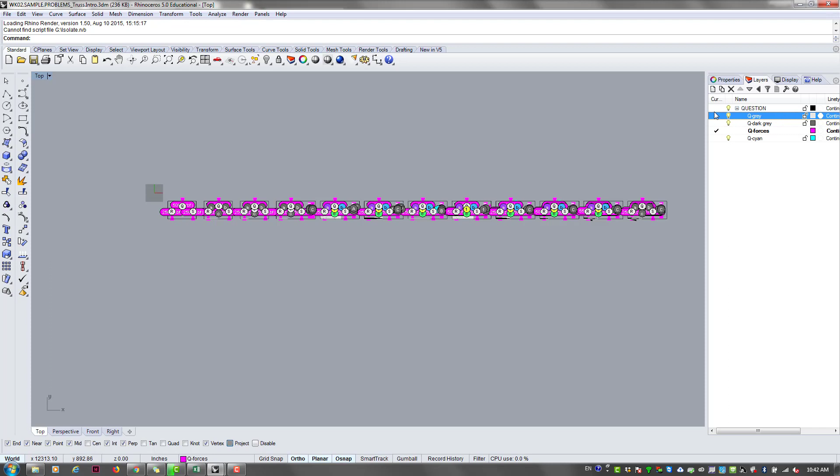This one here, right? It's called week 2 sample problems truss intro. So if you open the file, these dots are kind of annoying, but that's what you're gonna see. This is before I had this video recording thing, so I wrote all the processes in one go, which you can read, which is basically what I'm going to follow.

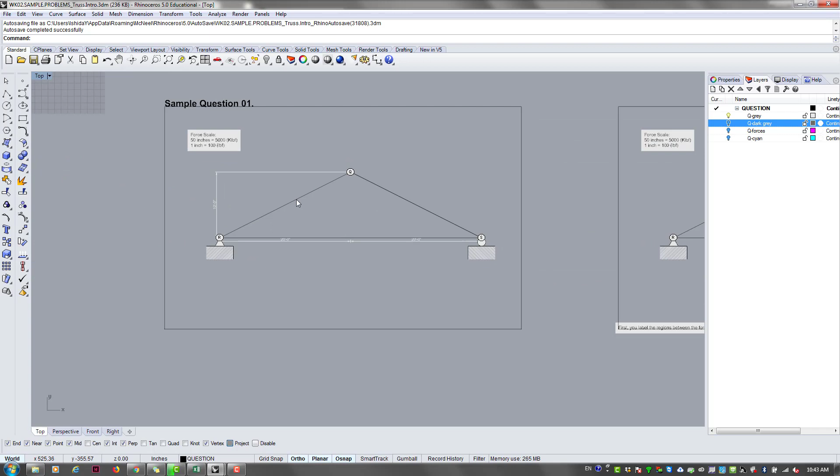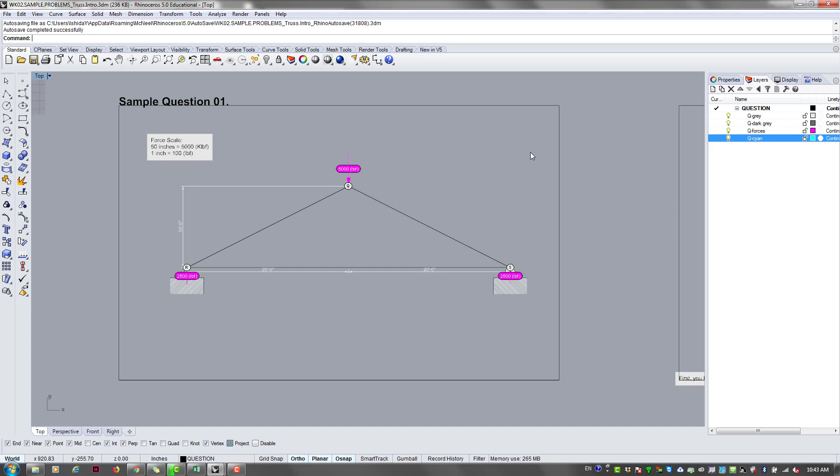So this is, you wouldn't call this a truss, but it's the first one that we did, the single triangle, that was actually called a simple truss, right? And if you keep connecting two members, one joint, it's a simple truss. So you could call this a truss, and it's the simplest configuration, so it's good background for us to show you how to analyze the truss. It's basically the same process for something more complicated, but for the sake of demonstration, this is easy.

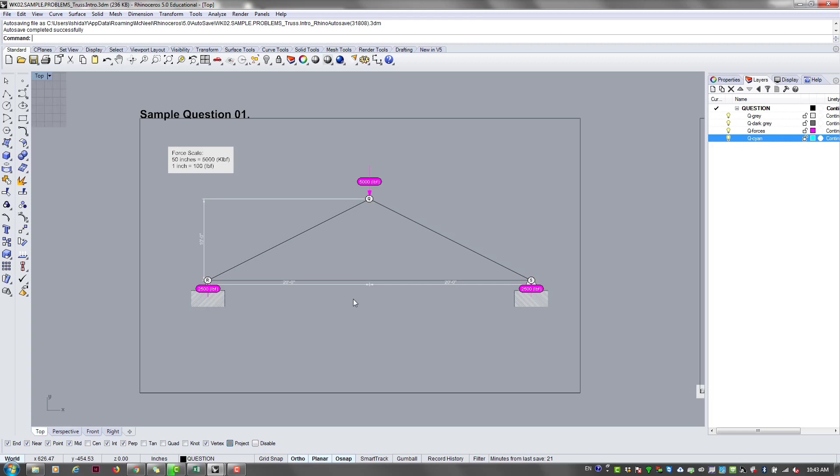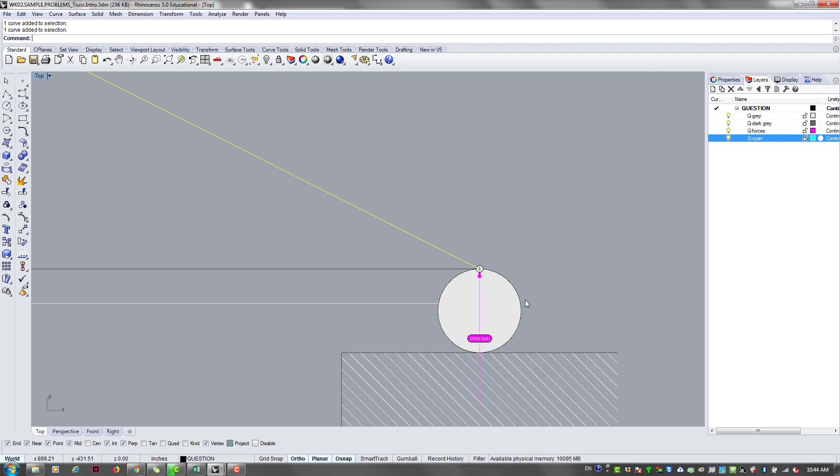So let's assume a triangle that's symmetrical, made of 3 members and 3 joints, pin joints, right? And then you have 2 reactions, as we talked about last week. One is a pin joint, the other is a roller joint. You could argue the pin joint has the capacity to have 2 reactions, but we know this one is 0, because if the applied force at the tip was diagonal, it's gonna have a vertical component and a horizontal component.

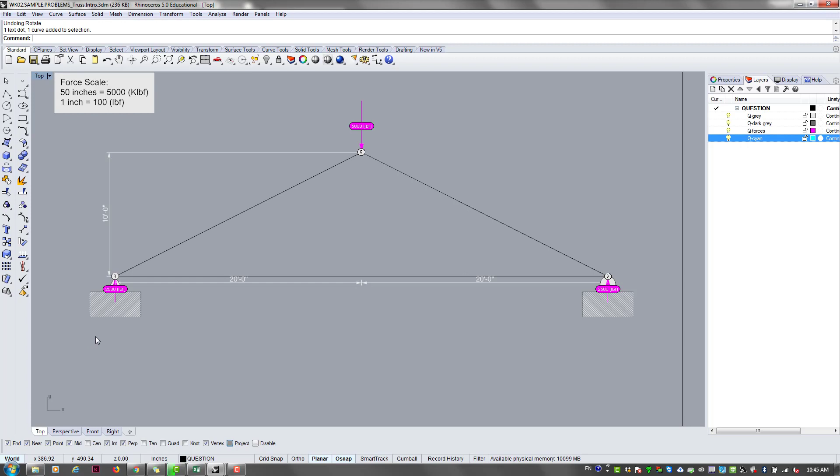If the applied force is diagonal, then the reaction at point R is going to have a horizontal reaction like that. But for this particular problem, we are just looking at this vertical applied force, so we have 0 horizontal reaction here. Anyway, we are going to learn how to determine whether each of these members, RQ, QS, and RS, is in tension or compression, and how much force there is in each, right?

And as always, the force scale. Who didn't take structure 1 with me? It's actually quite a bit. Okay, so if you don't understand what I'm saying, let me know, because we did this graphical method, so I'll try to make sure that you guys get it.

But anyway, we're gonna solve this graphically, meaning we are not gonna do a lot of calculation, but we are gonna draw a diagram of how the force flows in this truss, and draw everything accurately to scale. We're gonna measure the vectors and then determine how much force there is in each of these members. We are representing these forces with arrows, with vectors. But the first rule is that it's absolutely necessary that they are drawn to scale.

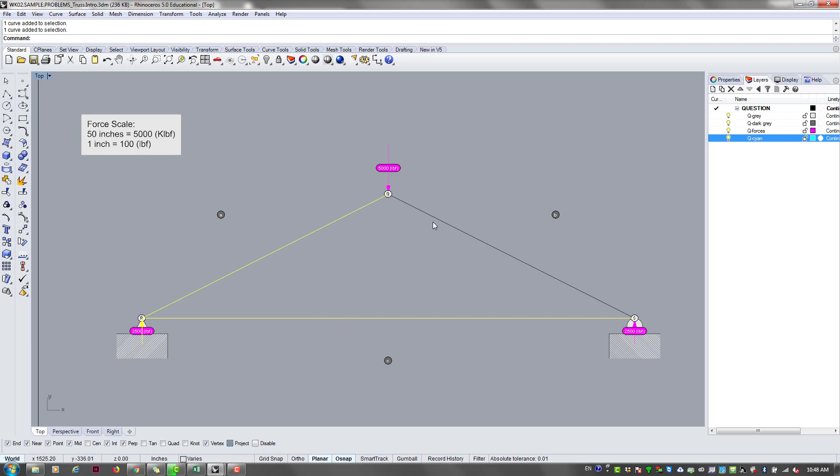So now we are gonna go to the next step. The first step of this graphical solution for the truss analysis is taking the outside of the truss and labeling these regions divided by these forces. So let's say, very diagrammatically, this truss and these three forces divide the world into different domains. It's gonna sound weird, but this you don't have to draw. I'm trying to explain something.

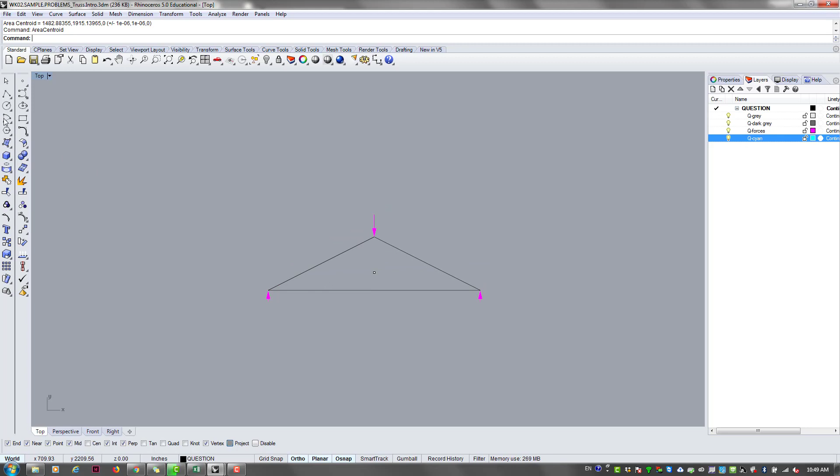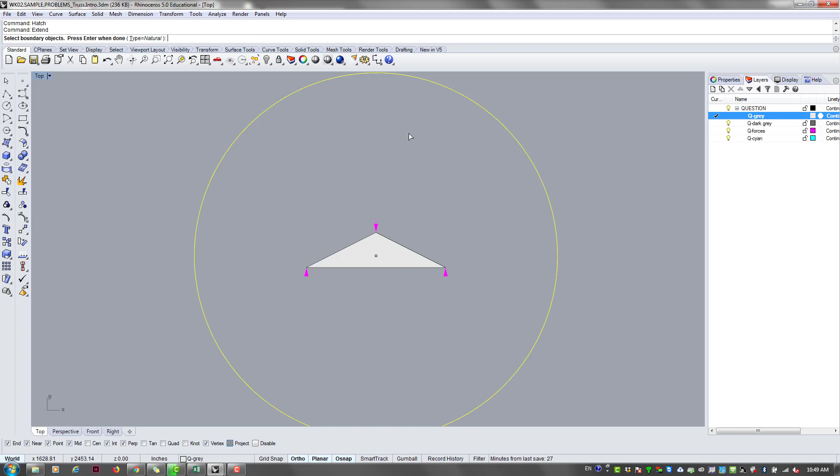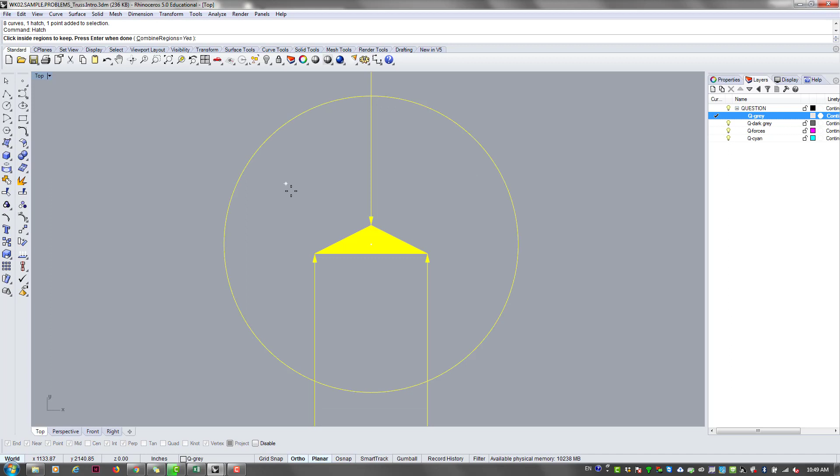So let's imagine we are in a 2D world, and the entire world is a circle, right? You have the inside of the truss and the outside of the truss. This is one area, I'm gonna use a different color. But also forces have these lines of action, right? So let's assume you're extending these forces infinitely. So now the world is divided into 1, 2, 3, 4 regions actually.

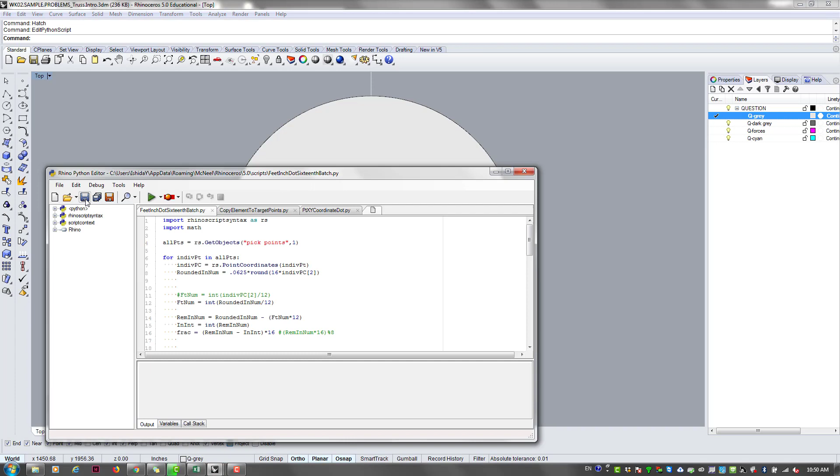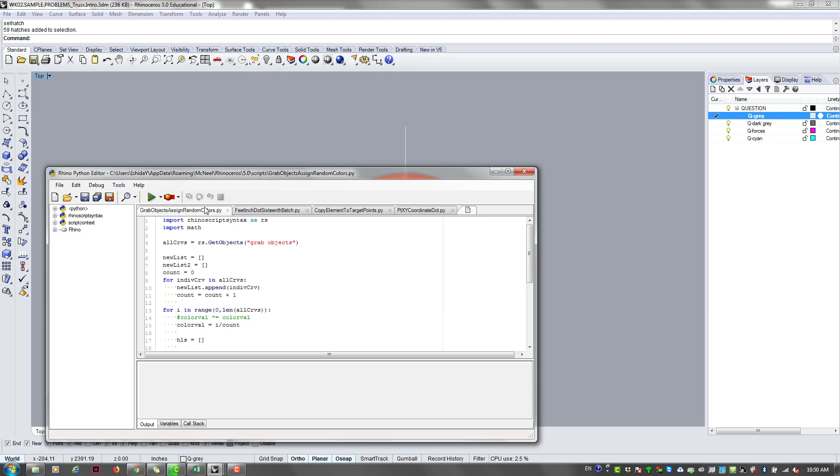And I'll share this script with you at one point. Just gonna color these 4 hatches. Oh, okay. So one region, two regions, 3 regions, and then, right, so you have these 4 separate regions, right? Is that clear? So I'll bring it back to here.

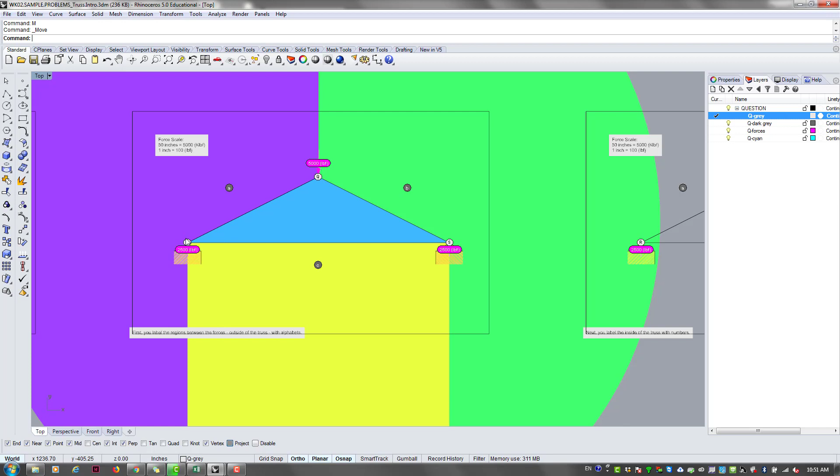Right, so now you can see, basically we're labeling all these separate areas. This is a really simple truss, so I'm not going to go inside the truss. We're just looking at outside of the truss, which is divided into these 3 regions, right? So between this reaction on the point R and the applied force at point Q, that's one region, and we're going to label that as A.

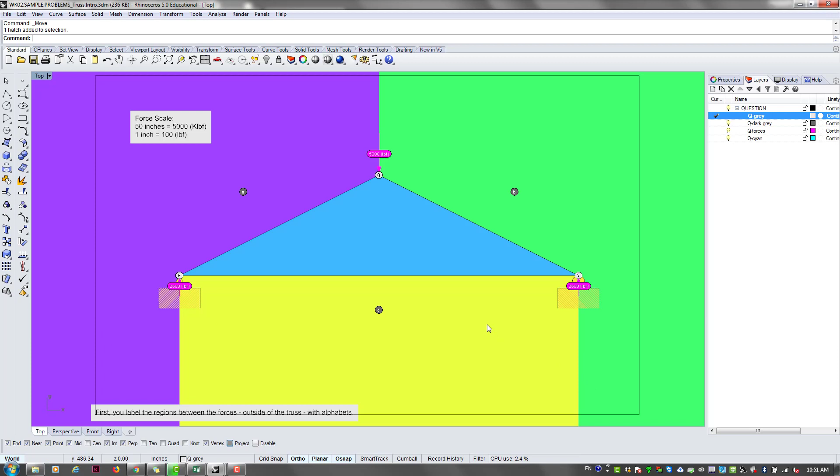On this side, between this applied force and that reaction, I'm going to call this B, right? And then between these 2 reactions, I'm going to label that as C. So that's all that's going on in that diagram. Hopefully that's clear, right? So there's A, B, and C between all of these forces. So that's the first step. First you label the regions between the forces outside of the truss with alphabets.

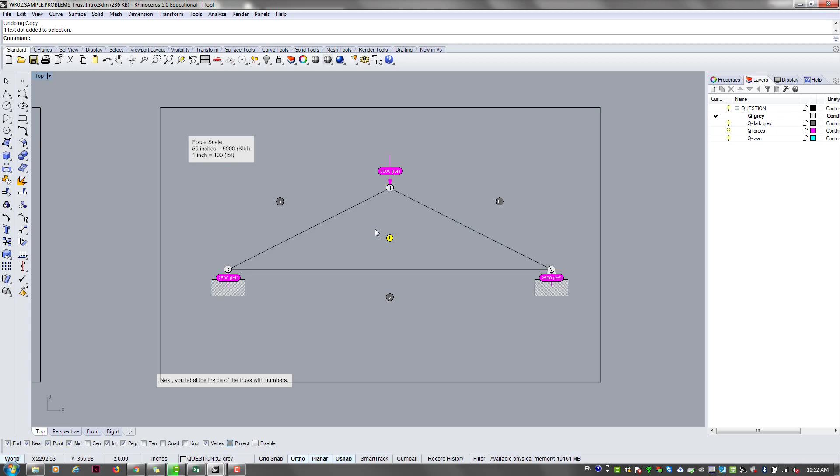Next step, yes, there's also a region inside the truss. Just to distinguish the outside world and inside world, we are going to label the inside of the truss with numbers. In this case, we only have 1, but we're going to get to more complex ones later, where we're going to number all of these with different numbers. For now, we're using this really simple truss, so there's only 1 region. So that's the first step, labeling outside and inside of the truss. So A, B, C, and 1. So far so good? Yeah.

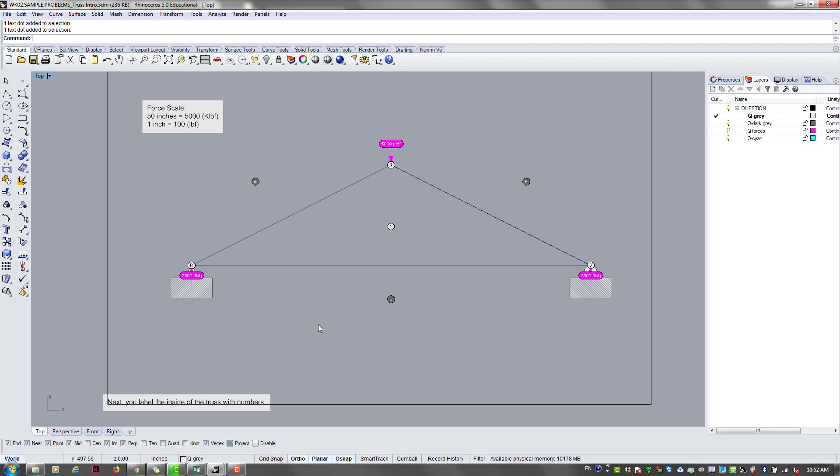Then next step is, alright, that's a wrong text. It's actually a form diagram. So we're gonna call this a form diagram because this accurately represents the form of the truss, right? Dimensions and angles and all that. This is what physically the truss looks like. We're now gonna start what's called a force diagram, which only diagrams the forces and has something to do with the geometry of the truss, but it's not going to look like the truss. It's going to analyze the flow of the forces in this truss.

So first step, okay, I'm drawing it in here, but I'm going to start new. First step is you basically want to put aside all of the forces that you see to the side, right? So we know that there is one applied force going down, and we know there are two reactions going up. So let's just look at the applied force for the moment. I'm just grabbing this one, copying it to the side. And we know this represents 5,000 pounds, right? So same size.

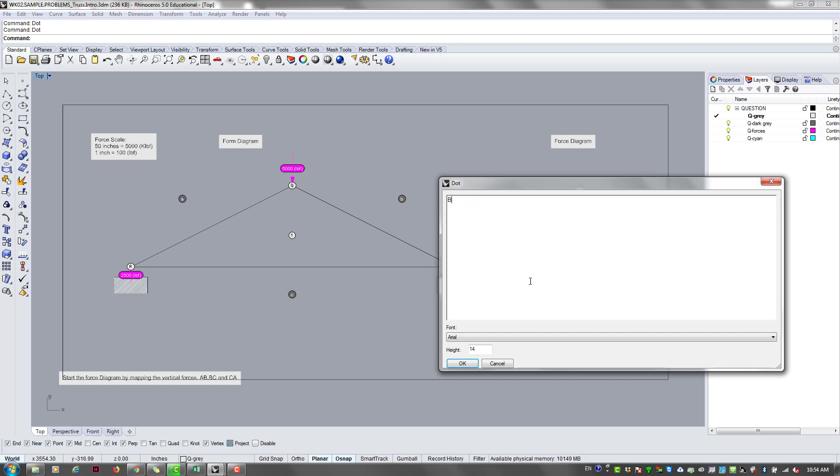And this happens to be between zone A and zone B, and somehow we want to be able to tell that from the force diagram. So you're always going to go from left to right, and we're going to label the start point of the arrow with A, end point of the arrow with B. So you can tell this is arrow AB. In the force diagram you read the start point and end point, so this is arrow AB. But also in the form diagram you can tell this is AB because it's between A and B. So either way, this is called AB, starting from A, ending at B. So that's the applied force.

But we also need to map the reactions, and because these are all vertical, we can connect them. And of course, because the whole thing is in equilibrium, this truss is not sinking into the ground, right? It's static, it's not moving. It's being supported by these two reactions, so you know that the total of these two reactions must be equal to the applied force. So first, the reaction on the right side, right?

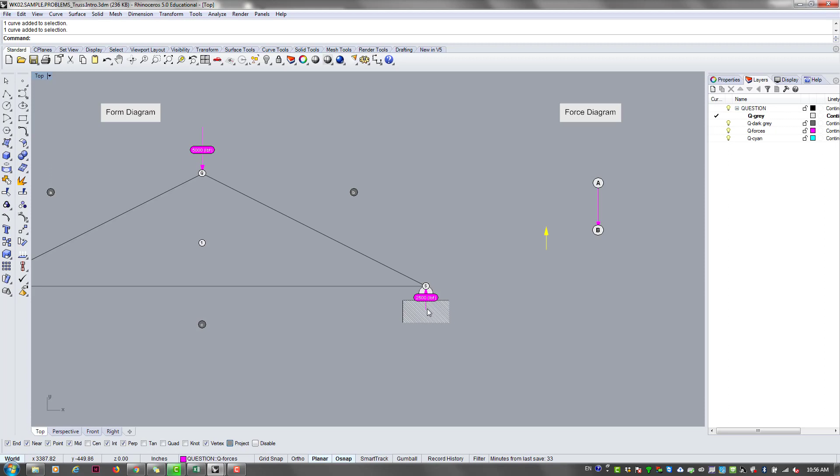If I take this reaction, it's between zone B and zone C. So if I follow this rule, this one was AB, and it started from point A, ended at point B. Now we are looking at this force, which is between BC. We're always gonna go in a clockwise motion. So this is called BC. So in the force diagram, it must start from point B, which is here, and end at point C. So now we know the end point of that upward arrow is C.

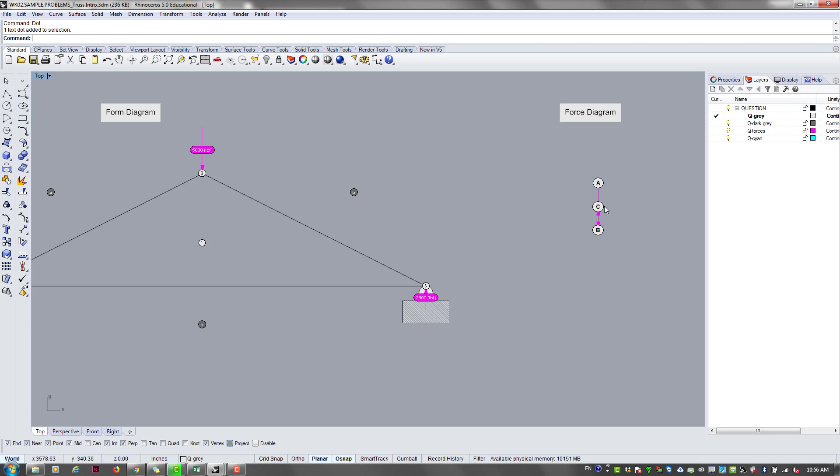And notice that, just to differentiate this and this, I'm using capital letters on the right side and lowercase on the left side. So we're gonna look at the next one, which is that reaction on the left. If you look at these zones, it's between C and A. And the name of that force, following this clockwise convention, has to be CA.

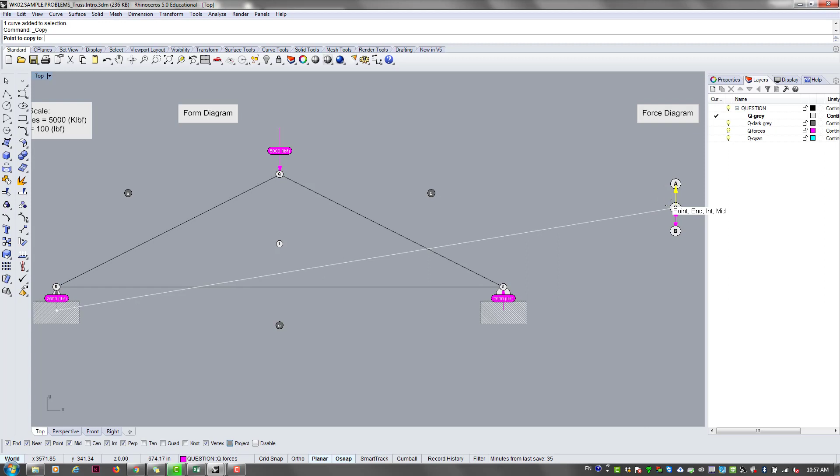And same thing on the force diagram. So this guy, which I'm gonna copy, is gonna be called CA. And following the rule for the force diagram, it's got to start from point C and end at point A. And it actually lands at point A because these two are half and half of the downward arrow. So that's the first step for the force diagram.

Any questions so far? We good? Okay. So now you can read all of these texts later. So let me just, yeah.

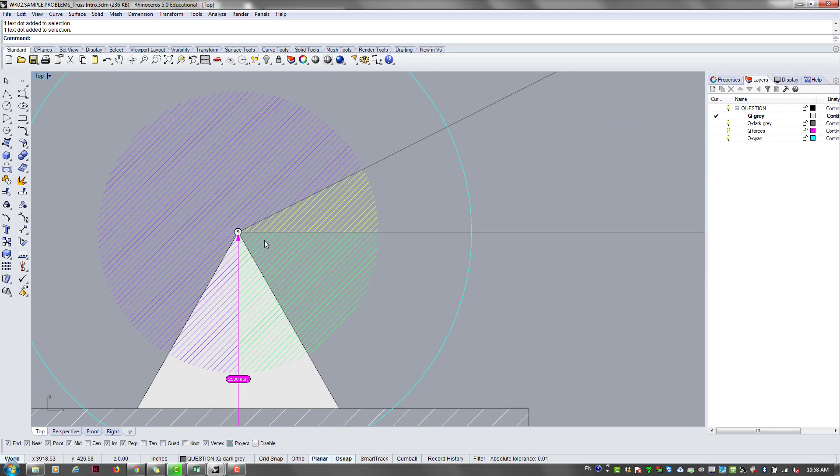So now what we're going to do is that so far we've only looked at these zones that are outside of the truss. So now we are going to go in. Also, we are going to look at every corner point of this truss. We're going to start from point R, go to point Q, then point S. So following that zoning rule, if I zoom into point R, let's assume the entire world is this round thing, right? And now it's divided by the members of the truss and the force that's present in there.

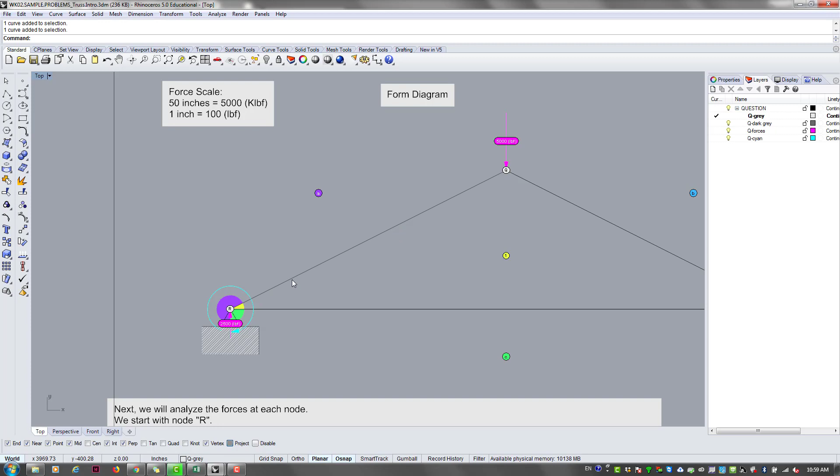The reason being that if you look at this point, we don't know how much or which direction yet, but if you're pushing this point in this truss, we know from last class that each member of the truss only has axial force, right? It's either being pushed or being pulled. So this member must be experiencing either a straight compression or tension along this direction. It's actually pretty easy to guess that it's in compression because it's being pressed down. So there's got to be a force in this direction, whether it's going this way or that way, right?

And also there's got to be a force in here. So even though we don't know how large or which way, we know for sure that there are some forces in these two. So the force divides the world. If that round thing is the entire world, with center R, between this force and that force has to be seen as one zone, right? And repeat that one more time? Yeah, so from where? The zones. Yeah, so it's following the same rule, the forces divide the world into different zones, right?

So there's got to be some force here, some force here, and some force here. And now we're focusing on point R. So we have this round infinite world whose center is R, right? I'm drawing it very small. But now because we have these 1, 2, 3 forces, that's gonna divide this pie into 3 pieces, right? So we have this first piece, second piece, and third piece. Now, all right.

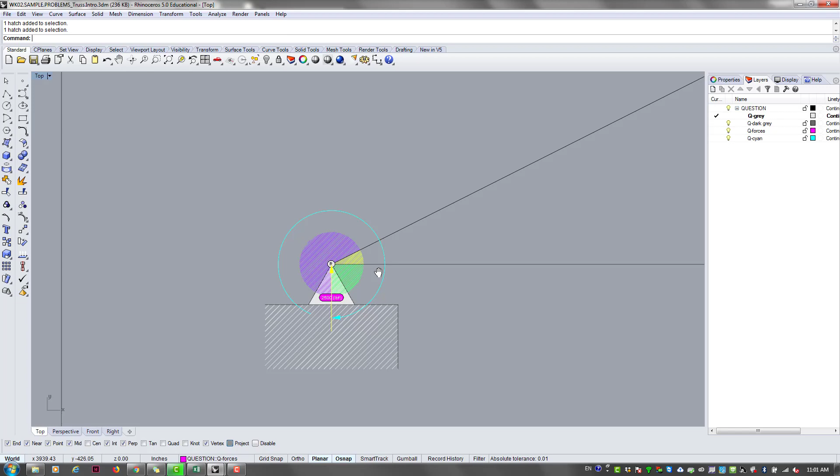So looking at that, we were able to call that force by referring to different zones, right? I color coded this. So C is still here, right? This guy is still C. That's still A, consistent with the first labeling that I had. And these two, that's inside the panel, so we labeled that as 1, right? So looking at this point R going clockwise, there's zone A, then zone 1, then zone C, and now you're back to zone A. Keep going around and around. Makes sense, right? So this force on the force diagram, we called it CA.

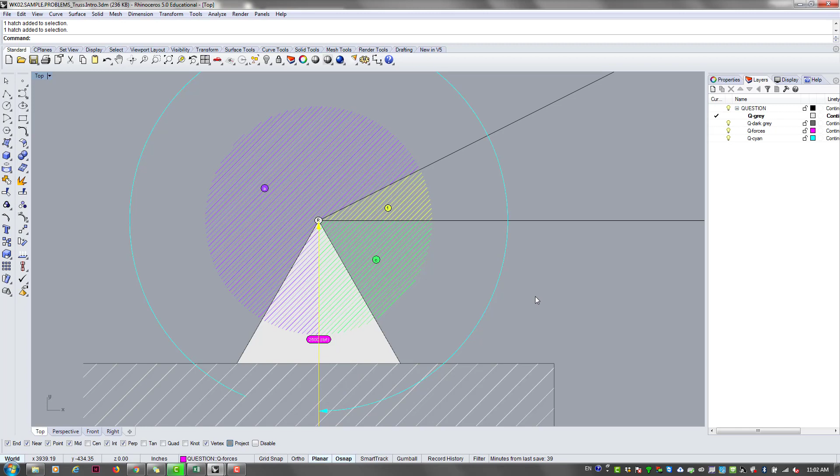Let me go back to 2 views, actually. So that reaction, because it was between C and A, going clockwise, starting from C and ending at A, was called CA on the force diagram, which is this guy from C to A, right? Makes sense? So following that same logic, this force in this diagonal direction, anyone want to guess the name this force should be called on the force diagram if we were to draw one?

A, where's B? B is way out here, right? So AB was actually, let's see, this was going from C, going clockwise, right? So you go from C, across the force, and end at A, so this vertical is called CA. Now we are looking at this one, you're going from A, across this diagonal, and ending at 1. Yes, so this diagonal force will be called A1.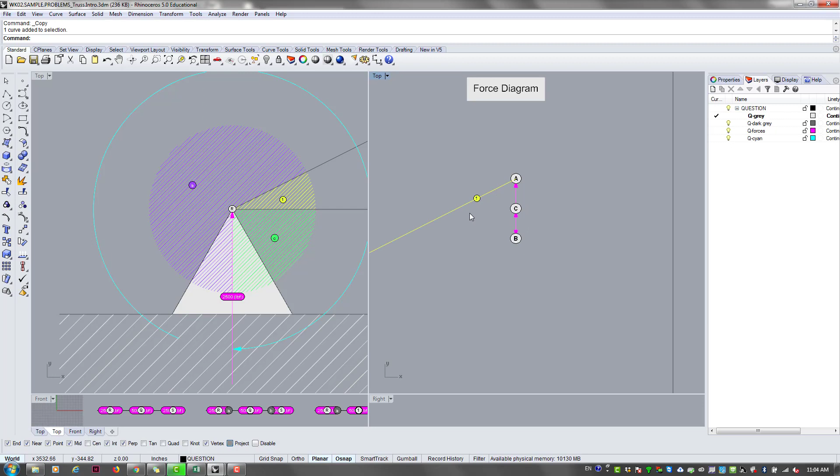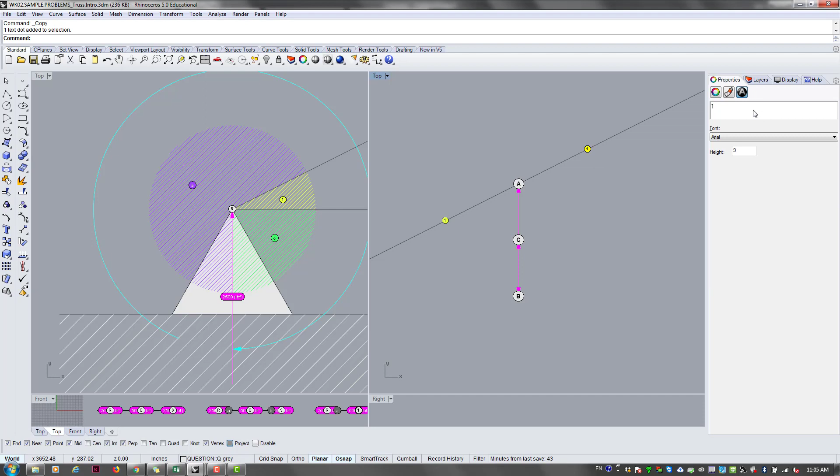So anyway, at this point we know there is going to be a force A1 on this force diagram starting from A ending at point 1, but we don't know actually. 1 could be here or there. Right. Is it kind of hard to see the text? So at this point we don't have any information to lock down point 1, but we know for sure that it's going to be along this line, but we don't know where it is yet. Make sense? Alright, so we're just filling what we can for now, right? So we kind of covered whatever we can for this force for now.

Now we're going to look at this one, which is between 1 and C, and we're going to represent it in here. So what is this going to be called? Right, this was A1, this was CA, so this has to be going clockwise. 1C. 1C, yes. So there's going to be a force called 1C on this diagram. It's going to start at point 1, which unfortunately we don't know. It's going to end at point C. And fortunately we know where C is, so this 1C thing is going to end at C.

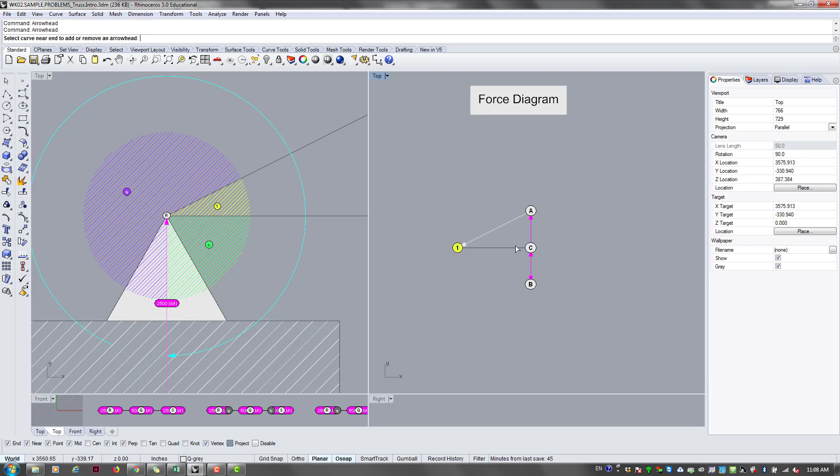So now, interesting thing is that, not to jump ahead too much, but now we have analyzed point R. We got all the information that we could from point R, right? But we still have 2 more points, so we're gonna go to point Q and point S. Yes, the force diagram is just for point R, for now. But we can now dictate what forces are acting on point R, right? So we have this reaction, which was CA. If I want to determine what this force is, I need to grab A1, starting from point A, ending at point 1. So that's how much force is acting towards point R.

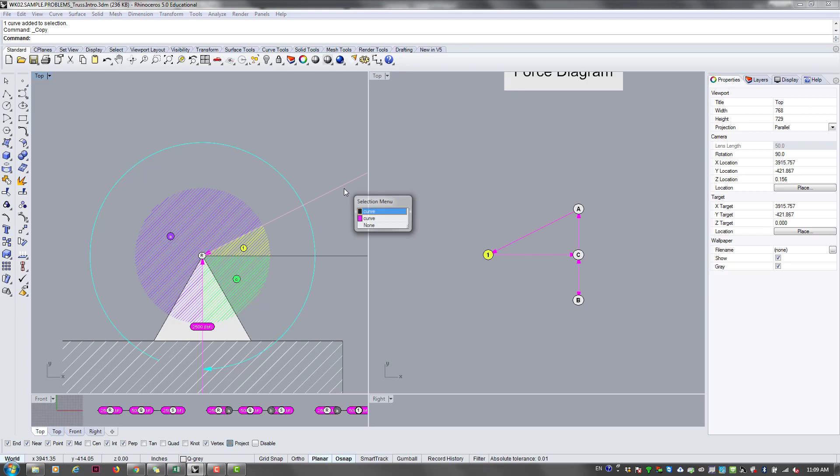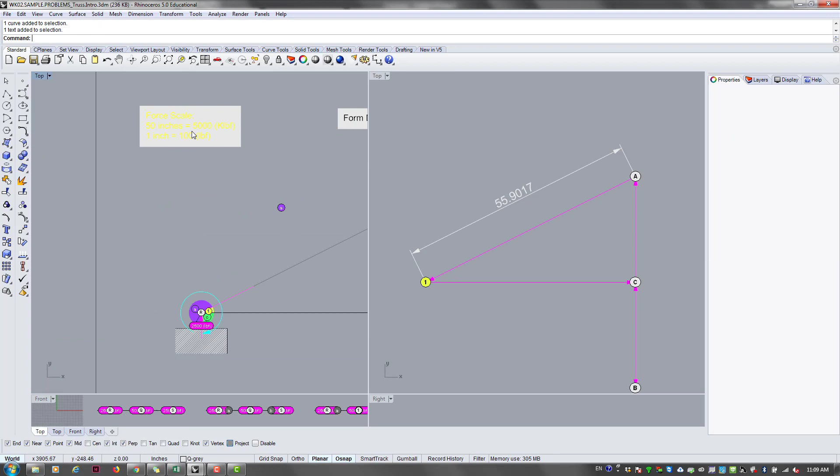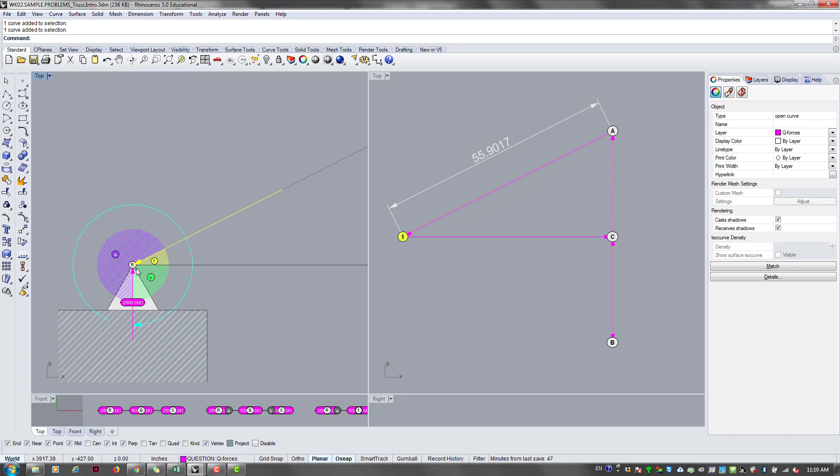And because we're drawing everything proportionally, the length of that vector matters, right? So this is 55. I don't like the fraction, I don't like the feet, so I'm gonna do decimal inch. So this line is like 55 inches, and if you remember our force scale, 50 inches was 5,000 pounds, 1 inch was 100 pounds. That applied force was 5,000 pound force, which is here and here, right? And now we have this diagonal force pushing point R, that is 55 inches, so it's like 5,590 pounds. That makes sense?

So we can determine the magnitude of this force by getting the length and applying the force scale, which we'll get to later. And we also know the direction of this force, it's pushing point R. So if we are analyzing a point, and the arrowhead is pointing to that point, that means it's being pushed, right? So then the diagonal member must be in compression, and also this reaction at point R is pushing point R up, which makes sense.

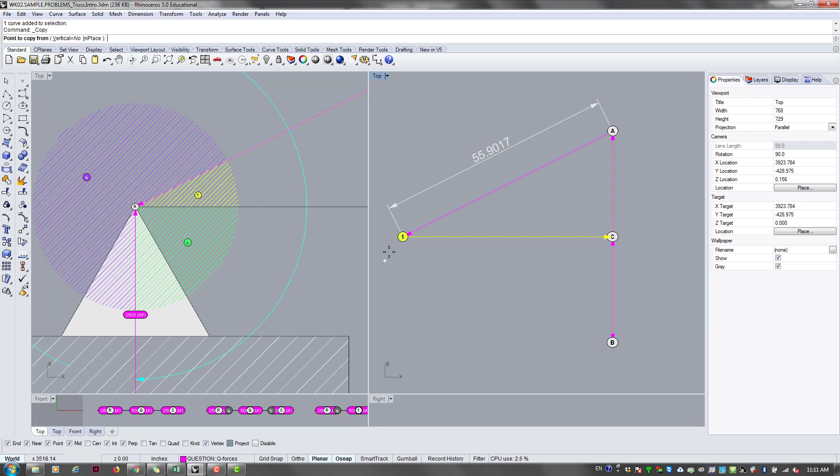And another thing we can determine is this guy, which is between 1 and C. So the force here has to be force 1C, which I can grab from here, starting at point 1, ending at point C. That's the force acting at point R along this truss chord. So now, because the arrow is going away from the point, it's pretty obvious, right? This point R is being pulled by this force.

Pulled, yeah. This was being pushed, and R was being pulled by this one. So already, because it's symmetrical, we know if this is pulling on its end, it's got to be pulling the other end the opposite way, right? Because if it's going this way and that way, this chord is flying through the air, right? So it's pulling. So the bottom chord is in tension and the top chord is in compression.

So that much we already know actually. I think I kept doing this last semester, but if I started doing the split, my legs are obviously in compression, but at some point, like if I'm on the roller or something, I'm just gonna keep splitting, and if I need to remain static, then something's gonna be pulling my legs in, right? So that's kind of the easiest intuitive analogy that you can think of. So it's very natural to think that these two are in compression and the bottom one is in tension.

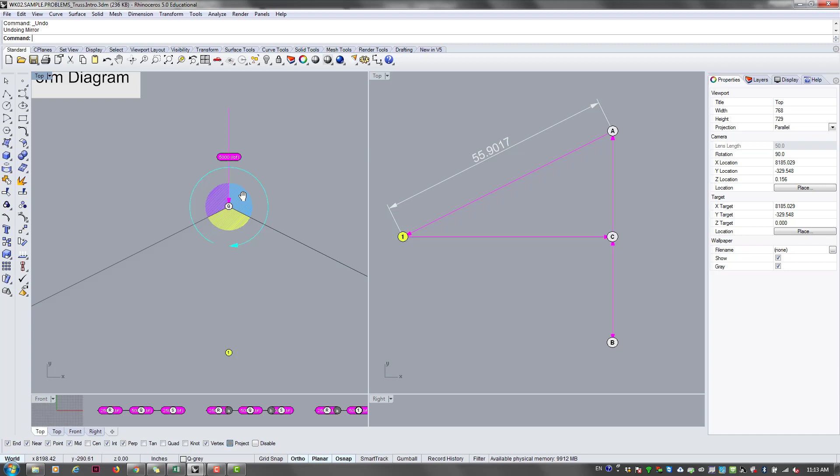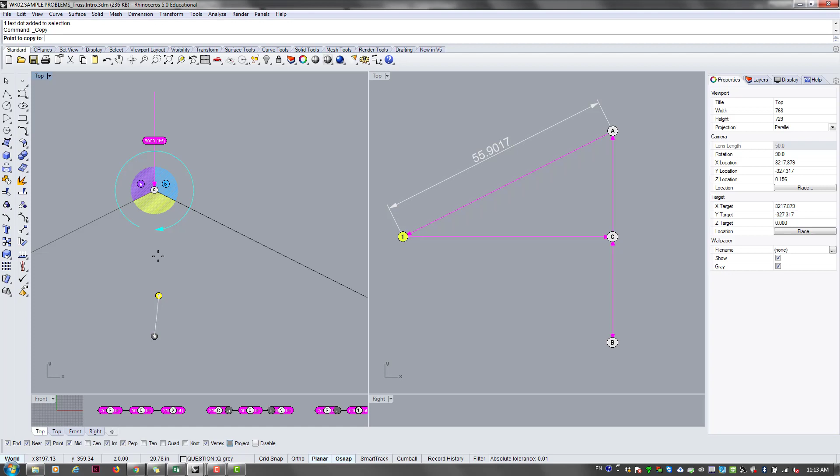Anyway, because we're trying to learn the process, I'm just gonna go step by step. So we're done with point R. Now we are gonna look at point Q. At point Q, there's a force here, there's a force there, and there, right? And we've already named these regions. So you have A to the left, B to the right, and 1 at the bottom. So if you zoom into point Q, you have force AB, which you already have, going from A to B, the first thing that we drew. And we have B1, which we don't have yet. And then we have 1A.

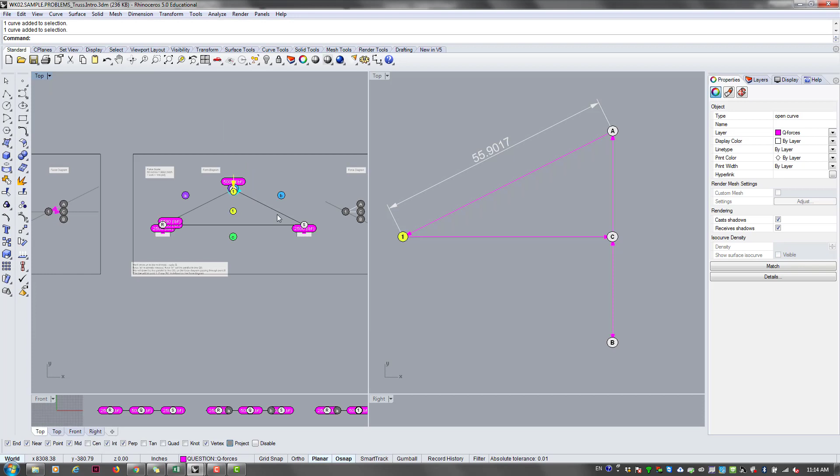So is point Q a reaction still? Point Q is a node on the truss, and this force that's acting on point Q is actually an applied force, right? You're applying this force, and these two are the reactions. So in a way, if you make this double, each of these reactions is going to be double too, right? But that's basically the load that it's supporting.

Right, so we do have AB already. This diagonal we don't have yet, but the force in this chord will be called B1, following the clockwise direction. Always follow this direction, so go from B to 1. We already have point B and point 1 on the force diagram, so it's really easy to tell that force B1 must start from point B and end at point 1. And the arrowhead must be on this side because that's the end point.

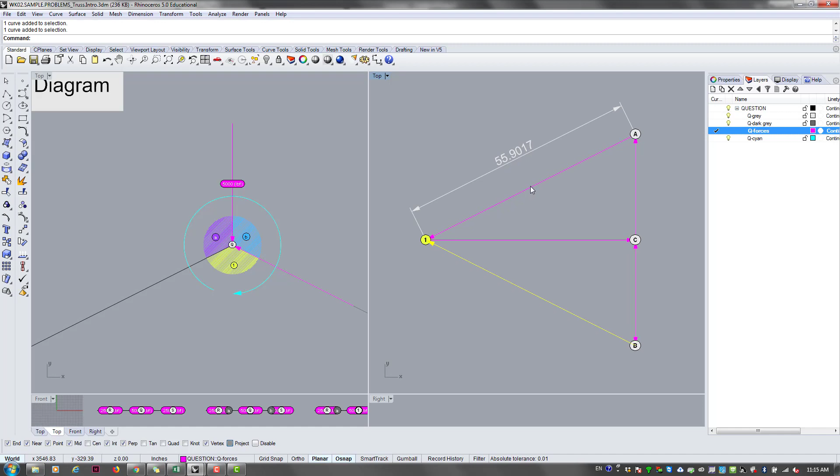So if I copy this to point Q, force in B1 is pushing towards point Q, which is in compression, which makes sense. And because the diagram is symmetrical, that's got to be the same length as that, so it's actually equal compression to the other leg. So that's good. That's simple, right?

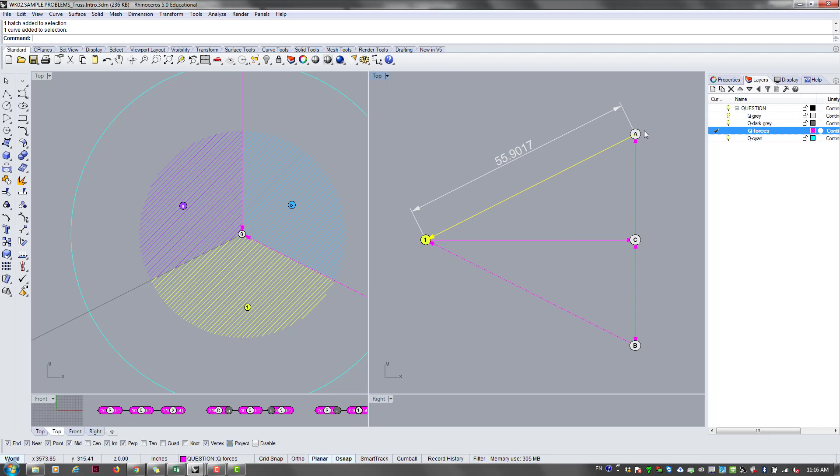The next one we're going to look at is this chord, which is between 1 and A. So the force in this chord must be called 1A, right? So it's gonna start from point 1 and end at point A. We already looked at A1 at the other corner, but now this is called 1A because of this order. So it's actually going to be the other way. It starts from point 1 and ends at point A. So that's the force at point Q in this chord.

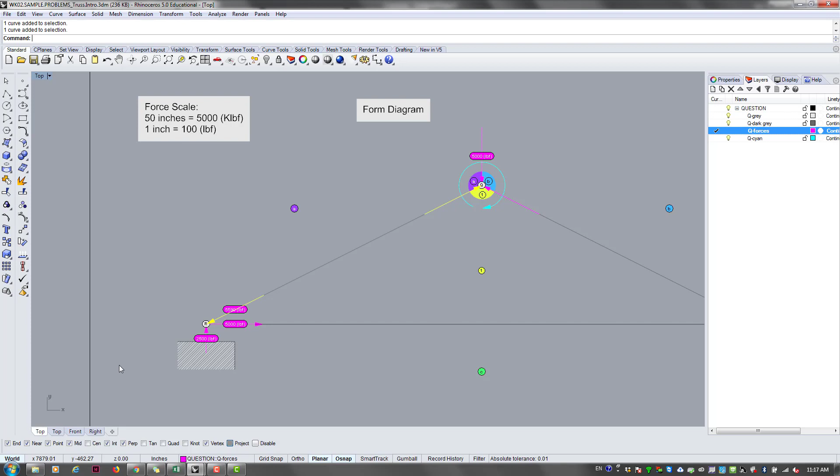And it's gotta be going this way, because if the arrow is pointing the other way, it means that it's in tension. But now, just by following these steps, we were able to show this force pushing point Q and that force pushing point R. So that's what the compression member does, right? It tries to push back. So that's why it's in compression by that much. You can determine the magnitude of that compression by measuring this line and applying the force scale.

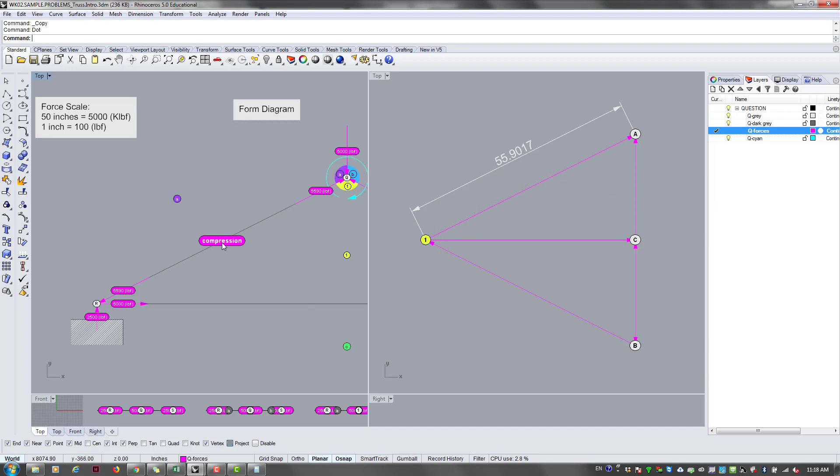So let's just do this calc, which is 55.9017 times 100. So that's the result: 5590 pound compression. So we already know this is in compression. So now we are done with point Q, I think. We got all the data that we can get from point Q.

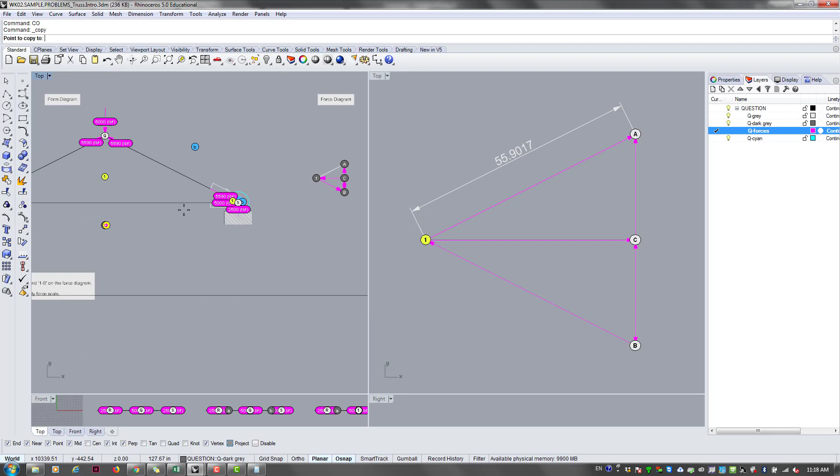So now we're gonna go to point S. Same thing, zone B is here. Zone 1 is on the inside, and zone C is right there, right? So did I already draw this?

Right, so we already had this reaction, which is BC, which is this way, and this horizontal one, now it's going to be called, anyone? Come on guys, come on, I need some energy.

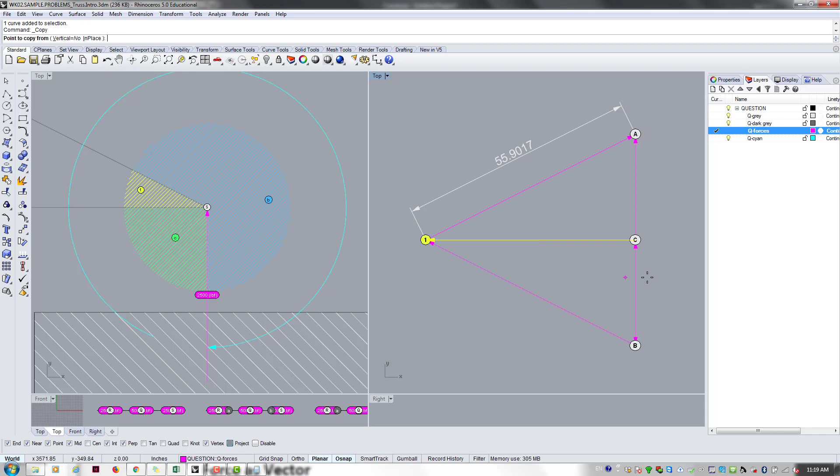C1. Yes, C1. So for this chord, the force should be starting from point C, ending at point 1. So it's the opposite of this, right? So that's how much force is in at point S. It's pulling away from point S, and if you get the length of that, it's 50 inches, and that's why that's 5,000 pounds.

And then what's this diagonal one going to be called? 1B. Yes, 1B. So 1B is gonna start from point 1, ends at point B. So you're gonna show that at point S, and you can see it's pushing on point S. So that's why. And that was like 5900, right? 5590.

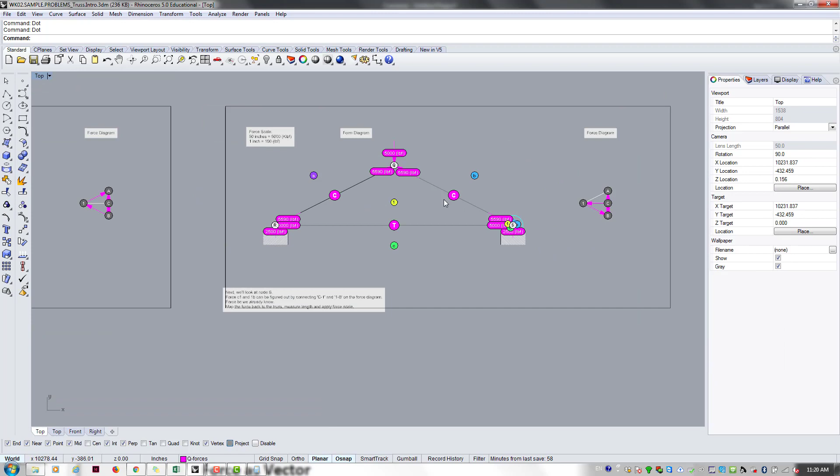So let me just show compression here, compression there, and tension at the bottom, right? So basically this completes the diagram. You basically measure this force, measure this force, measure this force. The direction kind of varies depending on which point you are in, but the bottom chord is in tension by 5,000 pounds. The top two diagonals are in compression by 5590, 5590.

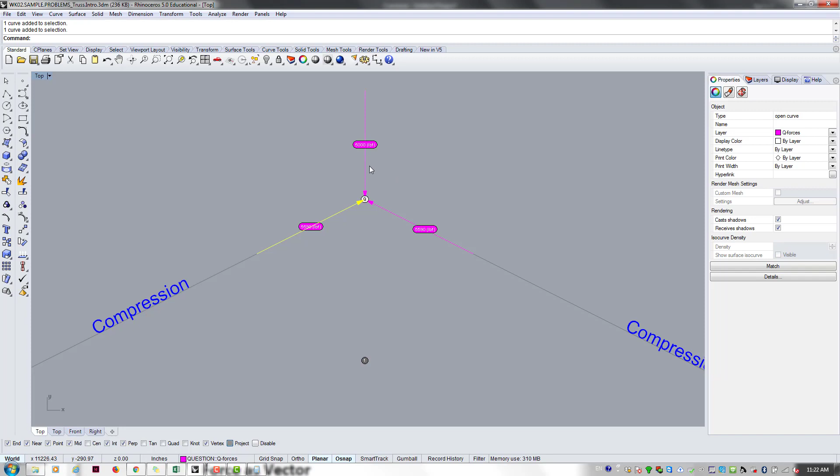That makes sense? So I think the important thing is that you apply this force, and the force that's in this diagonal member is actually greater than you would think, right? So the reaction is 2500, but now you have this 5,000, and you have this 5590 and 5590. You need these two forces pushing towards point Q to achieve equilibrium with this vertical force.

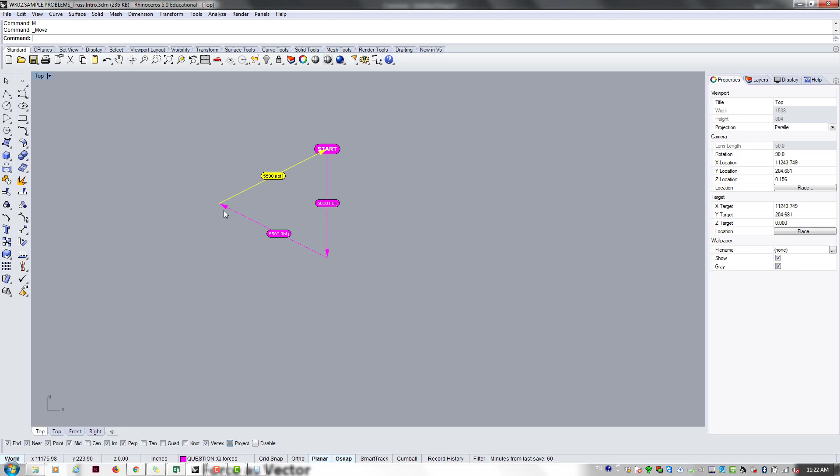Just to reinforce that understanding, let's ignore the truss and just look at this point and these three forces, and they must be balancing each other, right? The easiest way to add up forces by vectors is to always connect tip to tail. So let's argue that this is a start point, and you add this vector to this one. You connect the tail to the head, right? So you connect three vectors. It's going to start from here and end at the same point, meaning that the sum of these three forces is 0.

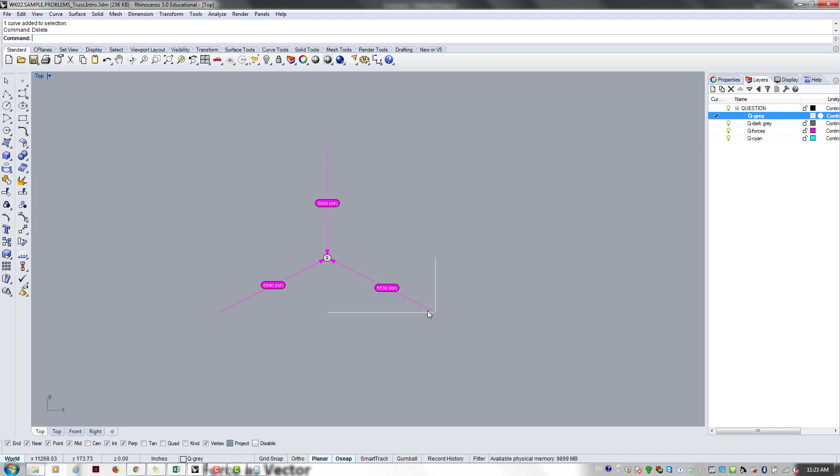Another way to look at it: it might seem slightly puzzling that you need that much force to support just 5,000. But if you look at the components of these forces, both of these can be broken down to a vertical and horizontal component. So this force is equivalent to an addition of that vertical force and this horizontal force. This is also equivalent to addition of this vertical force and that horizontal force applied at the same point, right?

So now, what matters is this vertical, right? If you add the vertical components of these two, that's actually completely equal to this applied force. So that's why you need that much force, because what matters to equilibrate this vertical force is only the vertical component of that force.

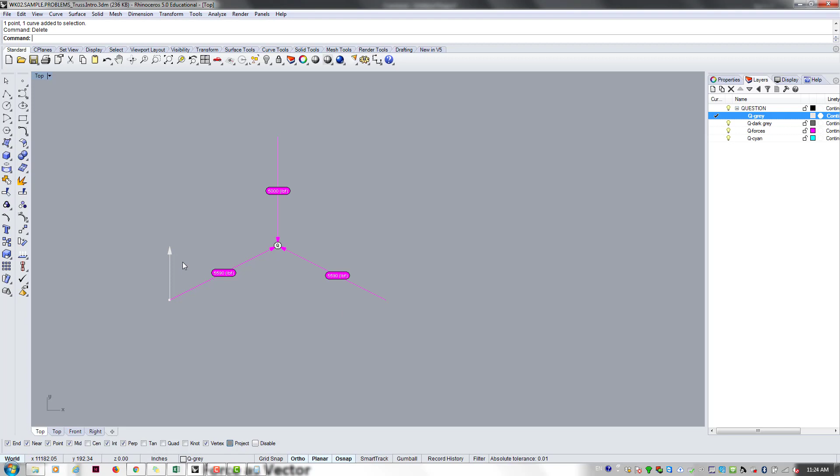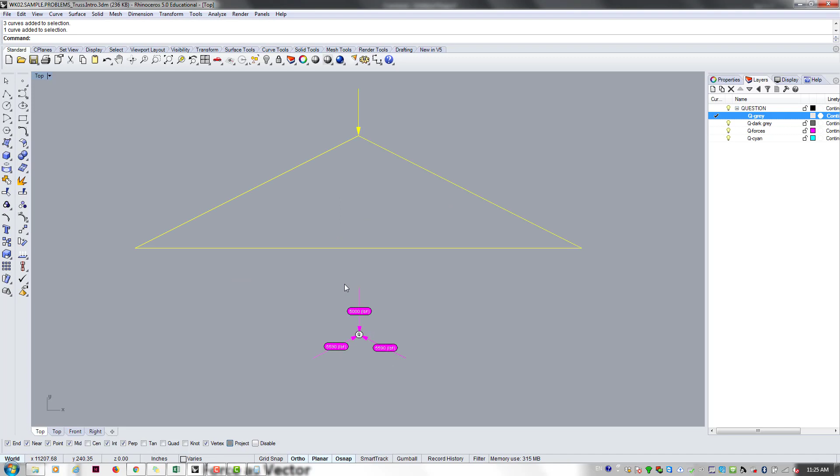So from this, now you should be able to guess. Let's say now we have a truss, right? Like this, and applied force here, right? And we needed that much force just to support that much vertical load because it's angled. So what I want to ask you now is, what if you change the angle of these trusses?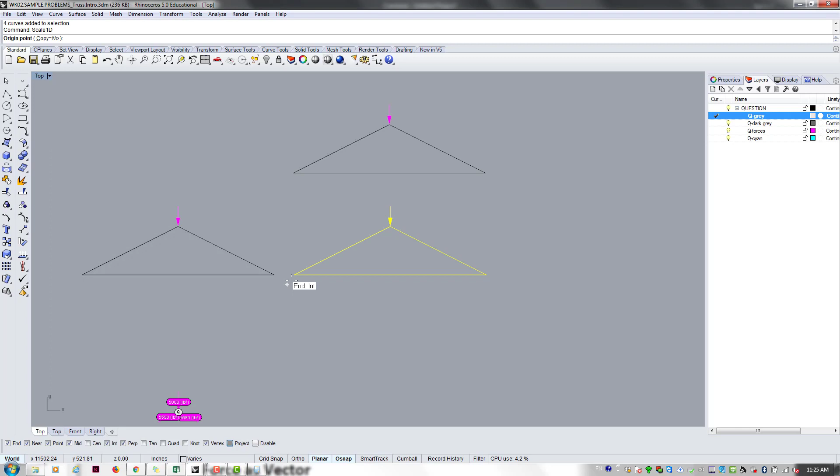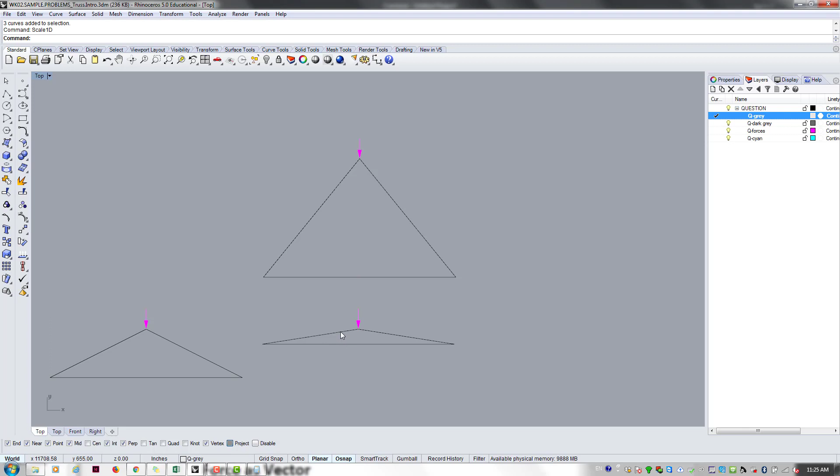Let's argue that one is shallower. Let's make it a lot shallower. Let me make one really shallow, and let me make one really deep. And just by looking at it, so this was how much force. Let's copy point Q2. This was how much force was necessary to balance out this vertical force at point Q.

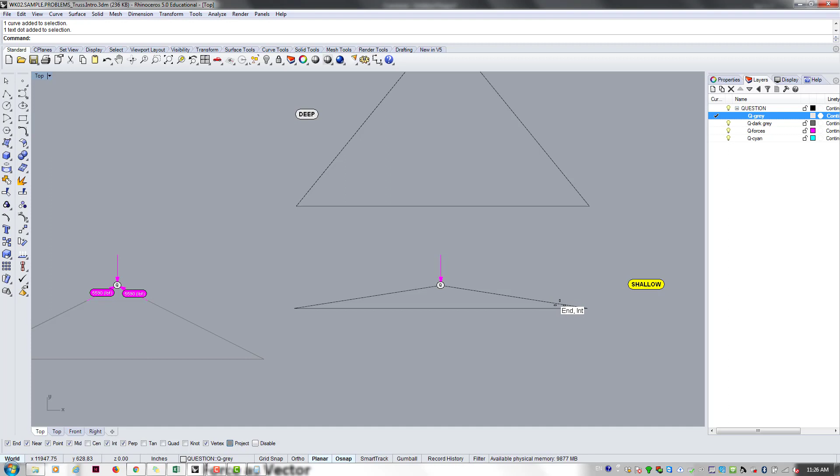So if the truss got shallower and deeper, the force that's in this member, let's just call it deep option and shallow option. In the shallow option, the force in this diagonal member, do you think it's going to increase or decrease from 5590? Increase, right? And if it got deeper, the force in here decreases, right?

That's because, compared to the original one, there is a lot more vertical component in this force, in this angle. In this one, there is a lot less vertical component in this force. So meaning that if you have more depth in a truss, generally speaking, you have less force in individual members.

And if you have less force in individual members, those members can be thinner, right? So in terms of use of material, if the truss is deeper, you are more efficient, right? Because you can use less material.

However, if you go too deep, then, let's imagine, I mean, that's already pretty efficient, but let's imagine if I made that 3 times as deep, we can do away with a lot thinner material. But it's gonna stop making sense, right? If your truss is like 10 feet deep, it's gonna get in the way from an architectural standpoint. So that's kind of always the balance.

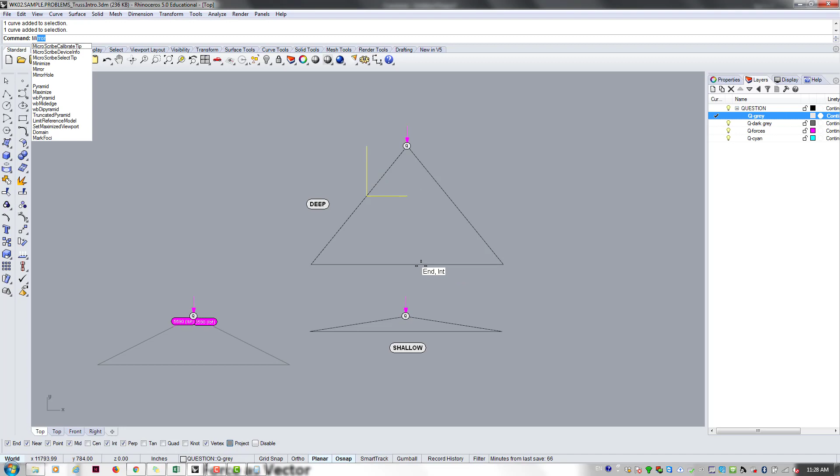But just to kind of demonstrate the point, you know, this angle, right, it has a certain amount of vertical and horizontal. So I can actually already guess how much I need, because it's gonna be split into 2 because it's symmetrical. So the vertical component of the left side only needs to take care of half of this force. So if I scale it to half, right, I'm gonna know already how much force is in.

So that's gotta be how much force is in this member, which, compared to the original truss, right? That's a lot shorter, so this is more efficient. And if you use this one, then I'm gonna need,

so just to take care of that much force, oops, so basically I need this much force to support this, because the vertical component of this force is only that much, which is half of this guy.

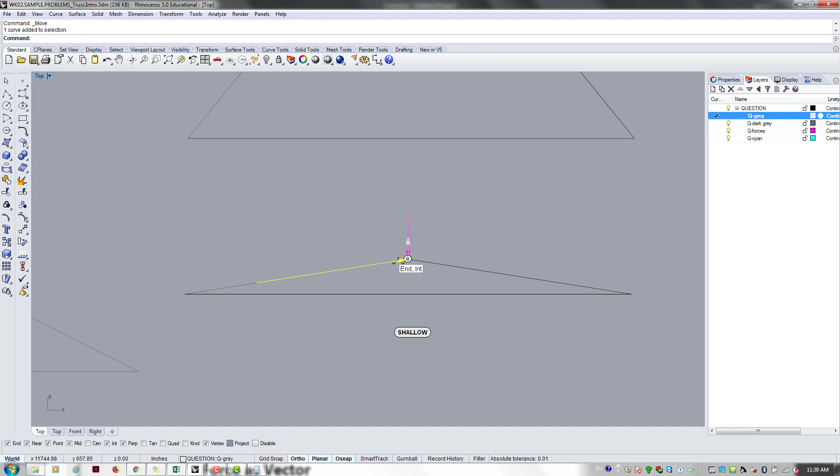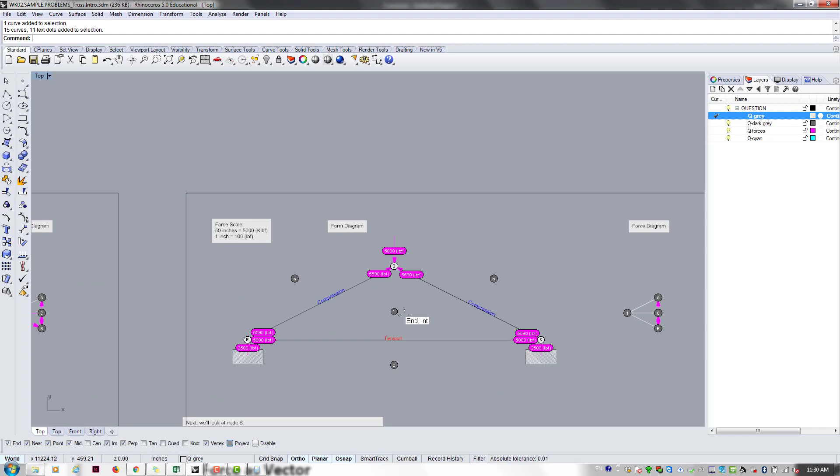So you can see just by looking at it how much more force is required in this member to support that. So the shallower you go, the less and less efficient the truss becomes. So any questions? Does it make sense?

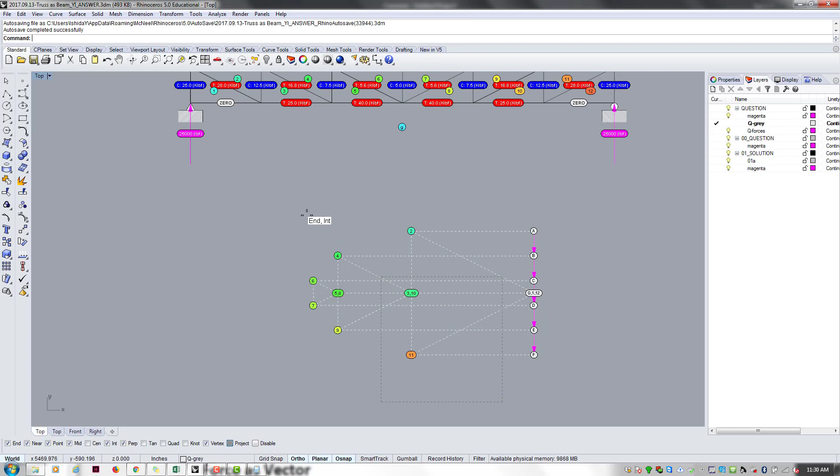This has to become almost second nature, because that took a while to explain, and it's basically the same thing here. It just takes a lot more process, and your diagram is more complex. So I really wanted to nail this so that we can quickly go through this next week, because right now we only have 15 minutes left, and I don't want to try to explain this one.

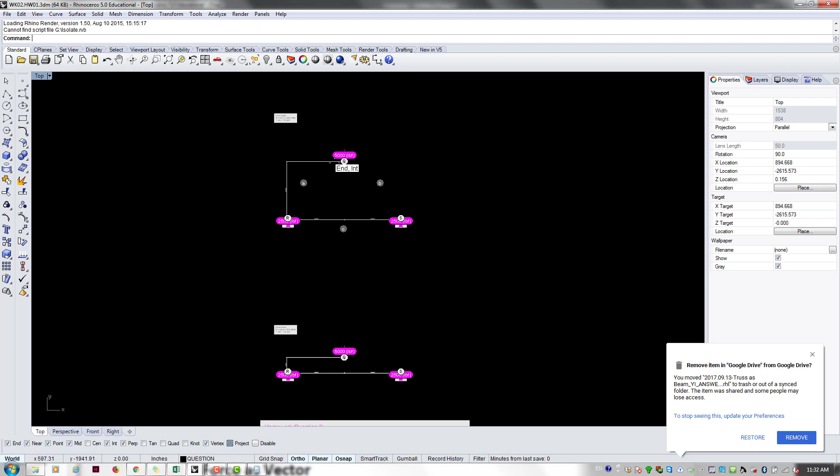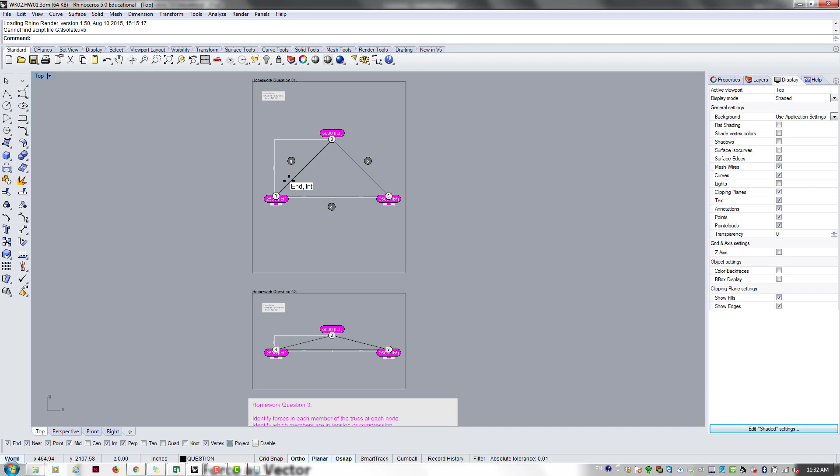So one's deeper, one's shallower, and this one's a little trickier. And it's probably not enough time.